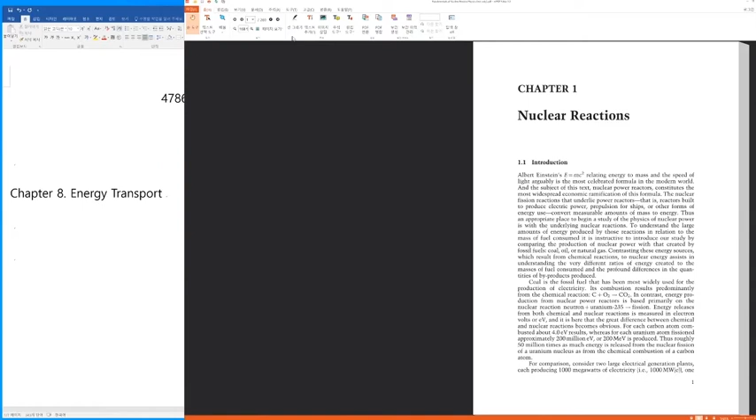We studied control poisons last time, and we studied how reactivity worth is estimated when we insert control rods. We learned two different cases: the first is when we only insert a single control rod, and after that we learned the case of inserting a control rod bank.

In this case, the assumption we utilized for inserting a control rod bank is that the whole area, or the whole volume, will be affected by the insertion of a control rod bank.

And so of course, if the control rod bank is inserted to x amount of depth, then this whole rodded volume will be affected by that inserted control rod bank. And we derive those equations, equation 7.99 and 7.100, depending on whether alpha is bigger than beta, or beta is bigger than alpha. These equations determine the multiplication factor k after the insertion of control rod bank, and because we have the change in multiplication factor, we are able to determine the reactivity. That is, if we inserted control rod bank, we are able to estimate or calculate the inserted negative reactivity by the insertion of control rod bank.

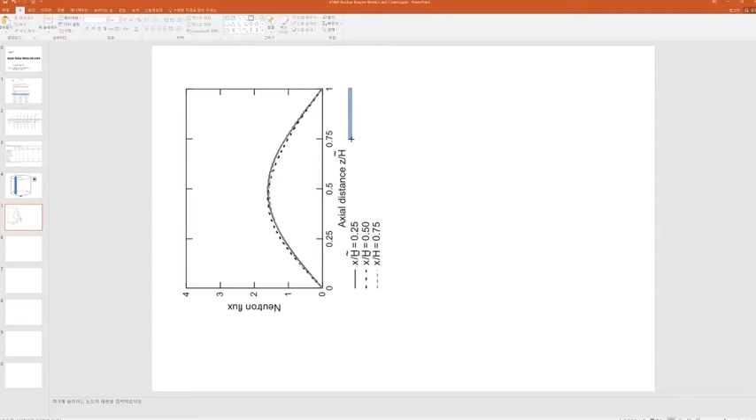So if we rotate this counterclockwise, this would be the shape of the neutron flux in the axial direction. And even though we inserted the control rod bank to a quarter of the reactor, or in this case almost half - first the quarter of the reactor, second almost the half of the reactor, and in the third case it is also almost inserted to 3/4 of the reactor - in these three cases, the overall shape of the neutron flux does not significantly change. That is why it is called a tightly coupled core.

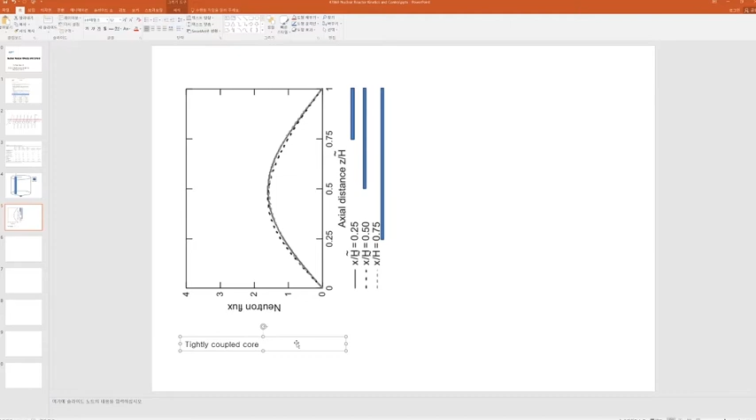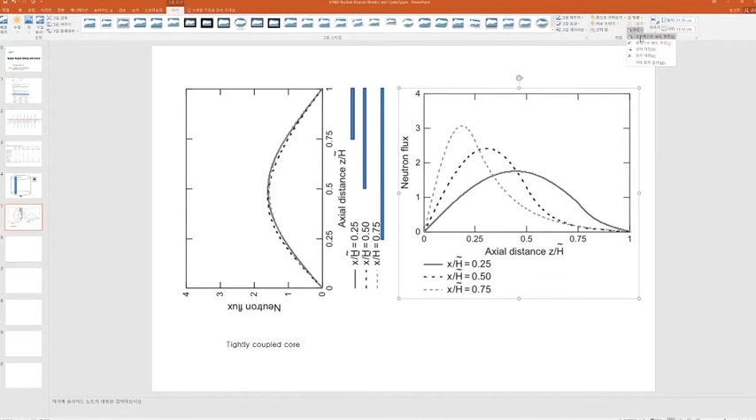So on the other hand, let's move to the second case. Once again, I'm going to rotate this counterclockwise, and move through these three different cases. This is the case when we inserted the control rod bank to the depth of just a quarter of the overall height. The second case is when we inserted the control rod bank to the half of the height, and the third is about 3/4 of the height of the reactor.

And you can see, if you look at this figure, why this is called a loosely coupled core. Compared to the first case - this is the case when height over migration length is around 10, and this is the case when height to migration length is around 50 - you can see that it is much more loosely coupled. The neutron flux in the upper part is different from the neutron flux in the lower part of the reactor. So whether a reactor core is tightly coupled or loosely coupled is determined by this ratio of height to migration length.

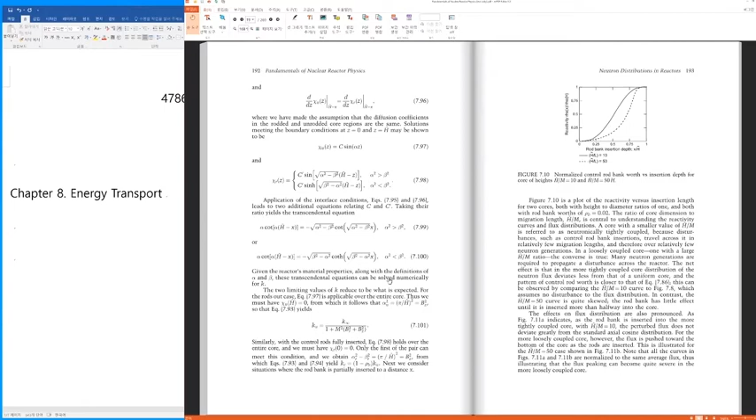So these were what we studied last time, and I also asked all of you - I'd like to see whether any student is able to draw these figures based on the mathematical analysis results provided in our textbook. If you utilize these mathematical descriptions, and if you understand and actually implement this, then you will be able to draw all these figures. So let's see who is going to successfully accomplish or finish this challenging problem.

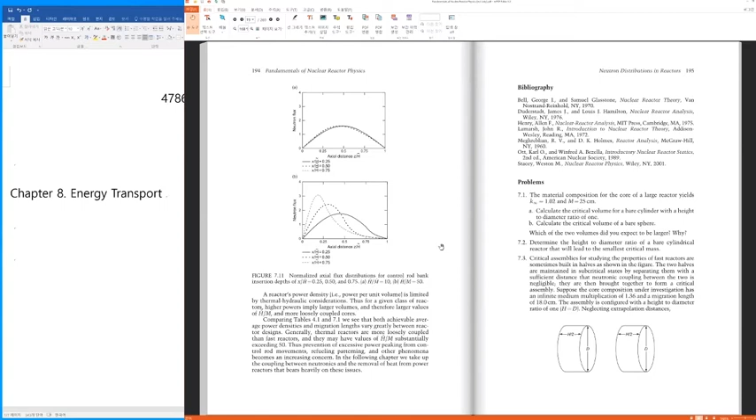So we just finished chapter or section 7.6 in our textbook, and from today we are going to talk about chapter 8, energy transport. So, energy transport.

So if we read the textbook, we are currently studying the course titled nuclear reactor kinetics and control.

The question that may be raised is, why do we study energy transport? The reason is that the preceding chapters concentrate on the time and space distribution of neutrons, and these equations are valid if the reactor power is very low.

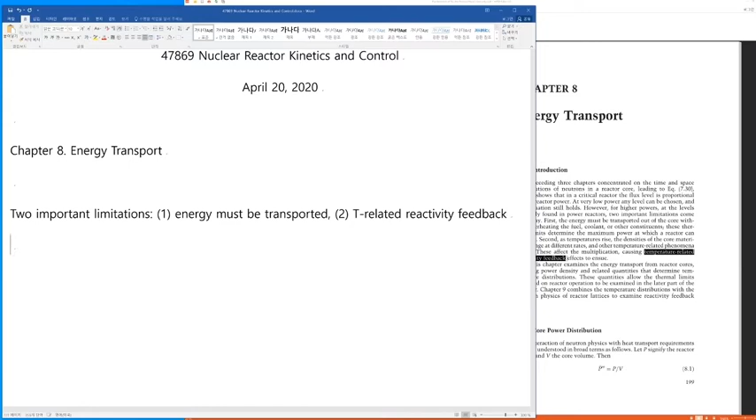So let's move on. Basically this chapter examines energy transport from the reactor core, and we are going to see what thermal limits will be imposed. After that, in chapter 9, we are going to examine the reactivity feedback effect. So in chapter 8, we are going to focus on the transport of energy and the thermal limits, and also learn how disturbances in temperature will affect the reactivity.

So anyway, let's first talk about core power distribution. That is section 8.2, core power distribution.

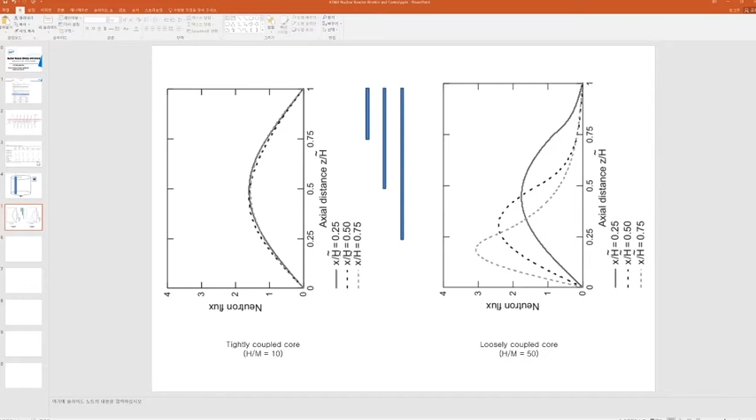With that value, these PWRs or BWRs usually belong to loosely coupled cores. The number of fuel pins and non-leakage probability, these data are also given for six different types of reactor cores: PWR, BWR, CANDU reactor, high temperature gas cooled reactor, sodium cooled fast reactor, and gas cooled fast reactor.

Let's move back to our textbook. This table 8.1 provides us some typical data that we can utilize in understanding what is provided in this chapter.

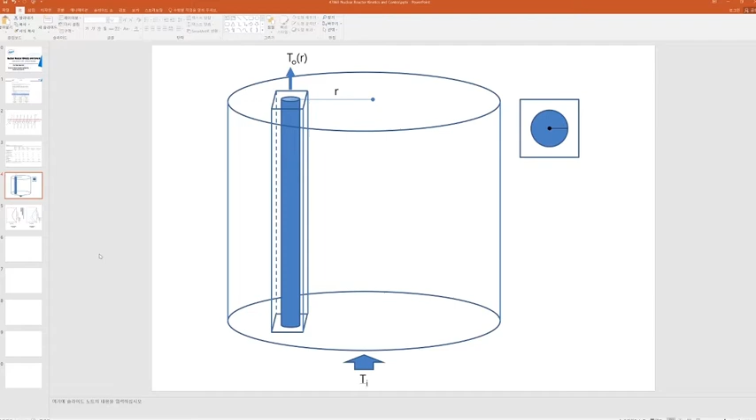Let's just think about a finite cylindrical core. Once again, let me show you this figure. In fact, I drew this figure myself, and we are going to think about a cylindrical reactor core. So back to our textbook.

Let's think about how we are able to calculate the average power density. Section 8.2, finite cylindrical core, and let's calculate the average power density.

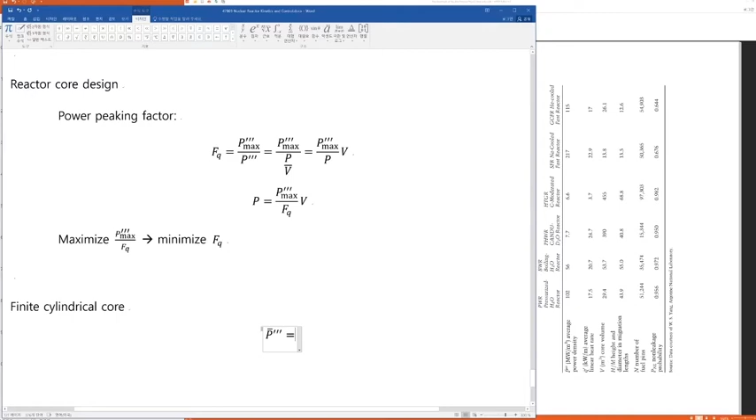The average value of this - so this is the average. To calculate the average value of power density, what we should do is calculate the overall power divided by the volume. So to calculate the power, we should integrate.

Of course, depending on the geometry of the reactor core, the power density as a function of its location can be calculated. So R vector indicates the location of interest in the reactor, divided by, multiplied with small volume dV.

This equation applies to any reactor core. In case of a cylindrical reactor core, let's first think about the volume. The volume will be provided as pi times radius squared multiplied with the height of the reactor. So this would be the volume of the reactor.

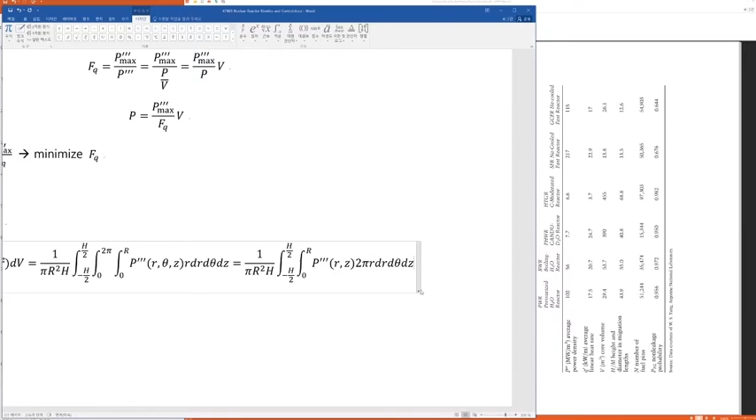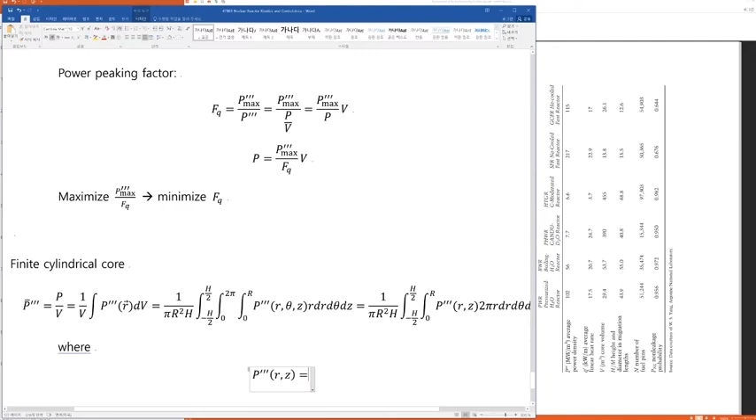And after that, we are going to use the relation that this power density or power at any point is divided into a power peaking factor in the radial direction and axial direction. That means the power at the point at some r from the center, and z from the center of the reactor core, is given as the average power density multiplied with another function for the change of reactor power in the radial direction, and also the change of reactor power in the axial direction. So if we assume that power density at a specific point is given like this, then we may rewrite this equation.

So instead of power density at a specific point, we substitute this equation. What can we do with this? This average power will be just constant with respect to the radial direction - and I'm sorry, I should also erase this theta here because we do not have any dependency, and 2 pi is just the result of this integration. So in the radial direction, we are going to take this average value out of the integral, and we are going to cancel the pi here and also the pi in the numerator.

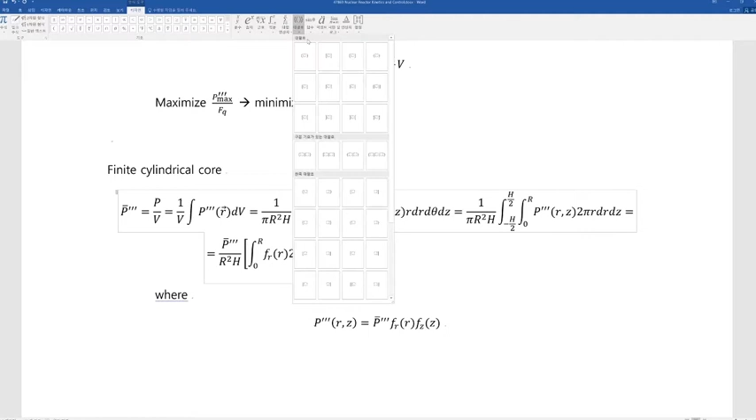And we are going to move r squared h, distributing this. So r squared will be placed here, so 1 over r squared, and also we are going to insert 1 over h here. So then in that case it can be just average power density, and because 2 is just a constant, we may take this out.

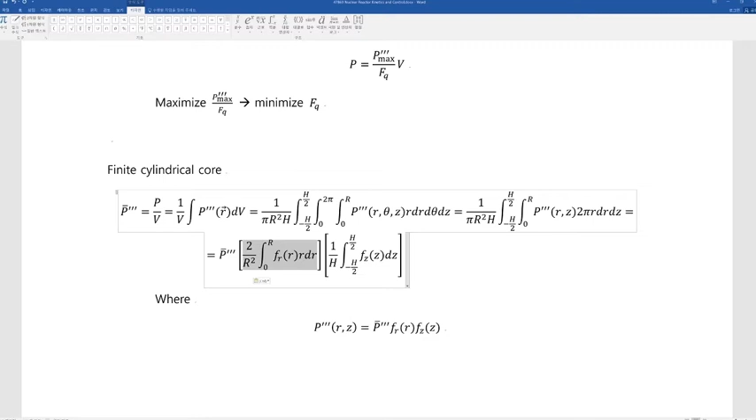So what does this mean? So average power density—we have another average power density here. So this means that this integration should become 1, that means this integration should be 1, and also this integration also should be 1. So these relations are given in equations 8.9 and 8.10.

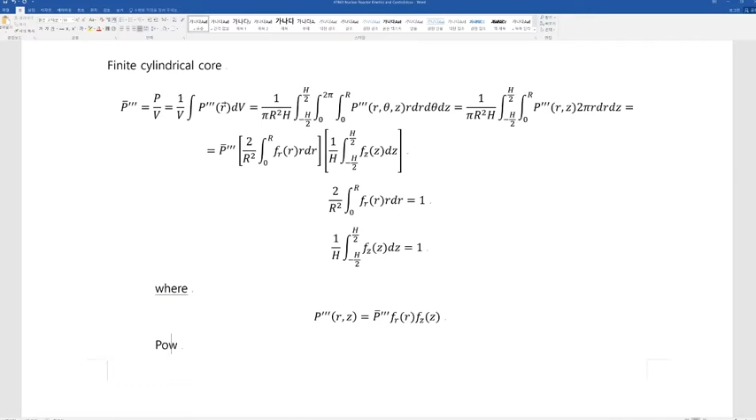And we are going to define, so previously, power peaking factors—we will be able to define two power peaking factors. Capital F subscript R will be the power peaking factor in the radial direction, so it can be called the radial peaking factor. And also we are able to think about the peaking factor in axial direction. So of course this would be the maximum value of FR.

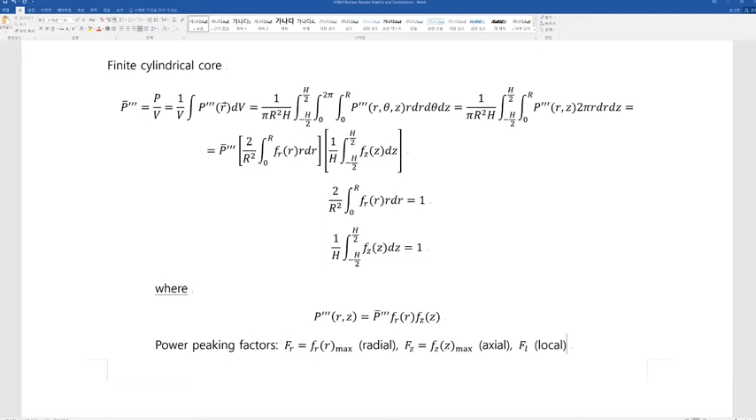Also, similarly, FZ, the axial peaking factor, will be the maximum value of fZ here. And also we are going to—so these two will be defined theoretically, and we will be able to define another one called the local peaking factor, denoted as F subscript L. This local peaking factor is for considering all other types of elements like fuel element manufacturing tolerance, and local control, instrumentation perturbations, and so on.

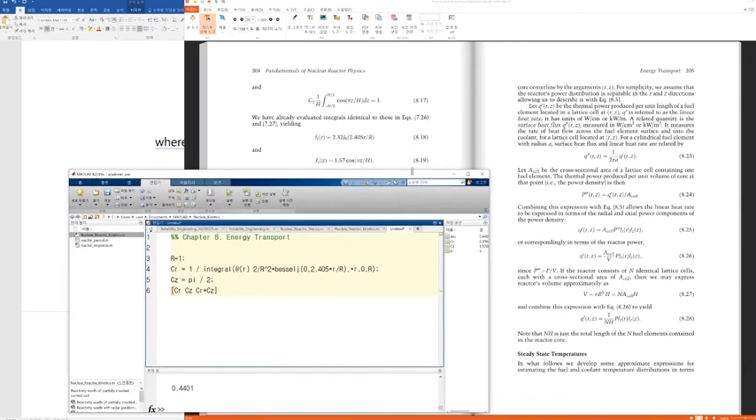And in the case of the first one, if we utilize MATLAB, then this is CR. So in our previous case, CR and this integration should become 1, that means CR should be given as 1 divided by this integration. So this integral of 2 divided by r squared, and integration over the Bessel function with 2.405 r divided by r, and we multiply by r, and then numerically integrate this from 0 to r.

And the result is that CR is given as 2.3165, and this is half of pi, and if we multiply these two, we get 3.6387. So these numbers are given in equations 8.20, 8.21, and 8.22.

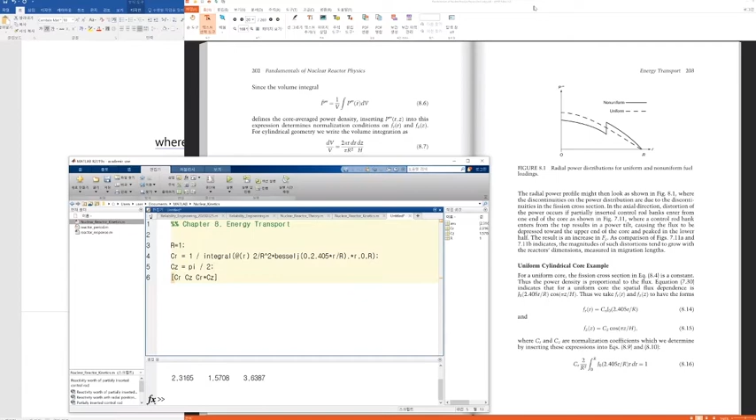So the point is that from these properties that this FR function should satisfy, and this fZ function should satisfy. In case of a uniform cylinder core, we are able to calculate FR as... let's see, FR was 2.3165. FZ is in fact given as half of pi. And FQ is given as the product of FR and FZ.

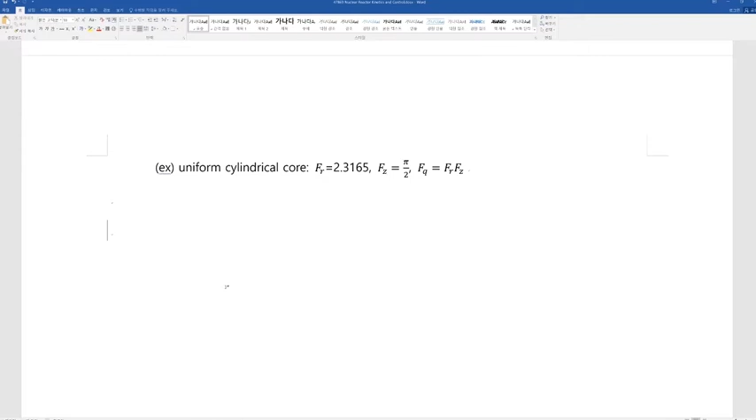So I hope all of you also try yourself to figure out how these numbers came from, and actually draw the shape of the neutron flux, so that you can understand why minimizing this radial peaking factor is important in extracting maximum power from the volume of the reactor that is already fixed.

So we just finished section 8.2. Well, it's already 4:10, so why don't we, even though it's a little early, stop at this point and take a short 15-minute break, then continue to learn about heat transport in section 8.3.

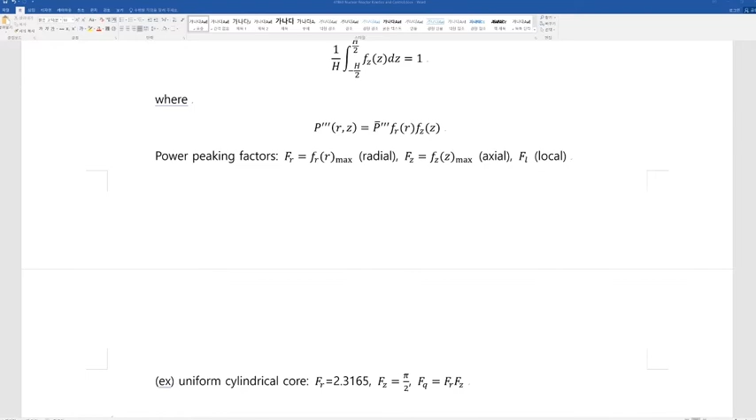Okay, let's start the second half of today's lecture. So we are going to talk about heat transport in section 8.3. We are going to talk about the steady state heat transfer, using a relatively simple model. The target reactor that we are going to consider is a cylindrical reactor.

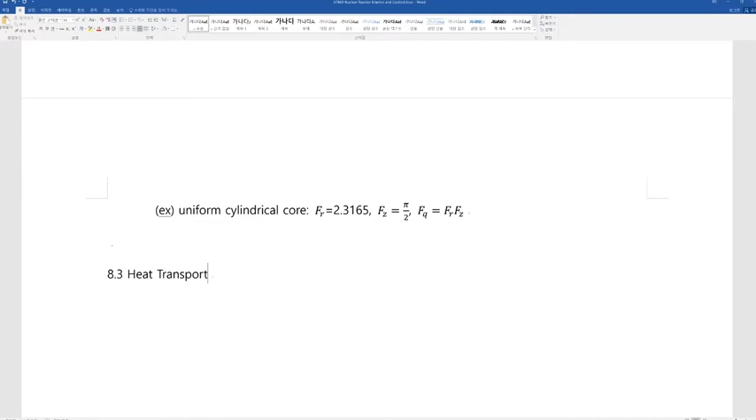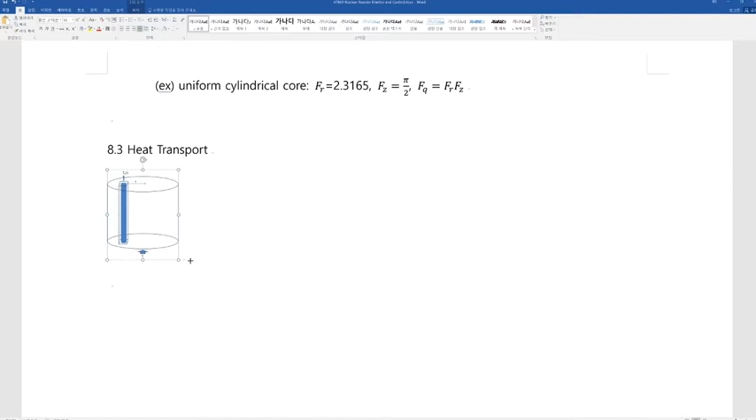So let me show you this figure one more time. This is the case that we are considering. Let's try to move this figure to our notes. So 8.3 is about heat transport, and I hope you remember we are currently thinking about a reactor core in this shape.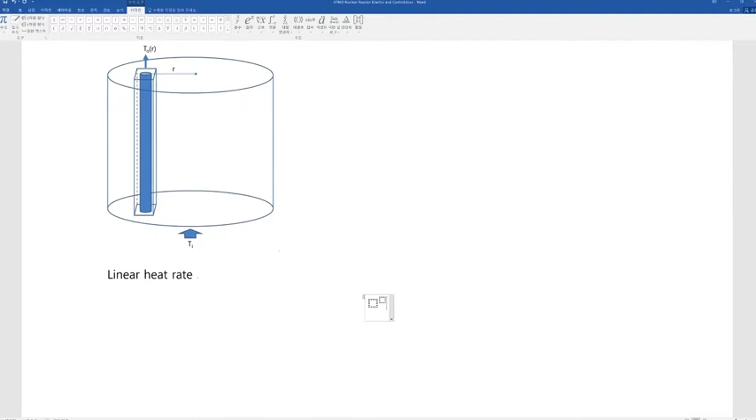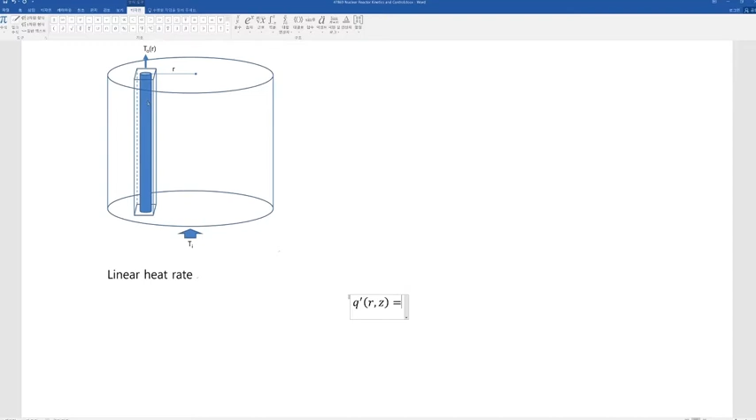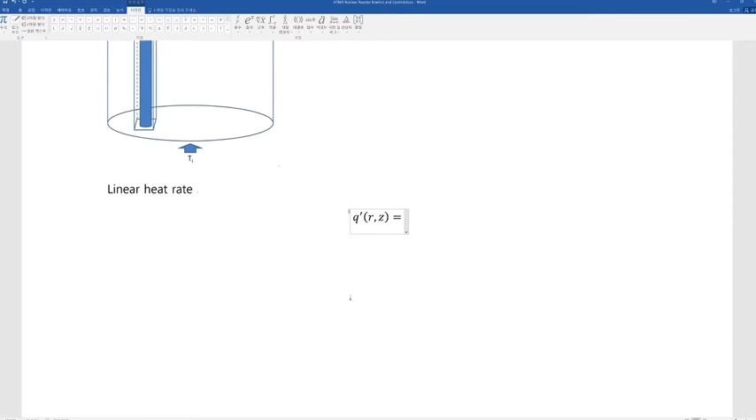So the first thing we are going to think about is linear heat rate, denoted as Q prime, as a function of R and Z. So this is the linear heat rate for a single fuel rod, and at any specific point R and Z, we are going to think about the linear heat rate at that specific point. That's also in our textbook; this linear heat rate appears in many different places, and we are going to first focus on this linear heat rate.

So another figure that we need to take is this. This is the figure where we see the fuel rod from the top, and the radius of the fuel rod would be A. If some amount of heat is produced inside of the fuel rod, then that heat needs to be transported through the surface of the fuel rod.

So when we think about the surface heat rate, surface heat flux, the relation between linear heat rate and surface heat flux would be 2 pi A. 2 pi A multiplied with the height will be the amount of the surface area of the fuel rod. So if we see all the height of the fuel rod, the heat generated inside of the fuel rod should be transported through the surface whose area is 2 pi A multiplied with the height.

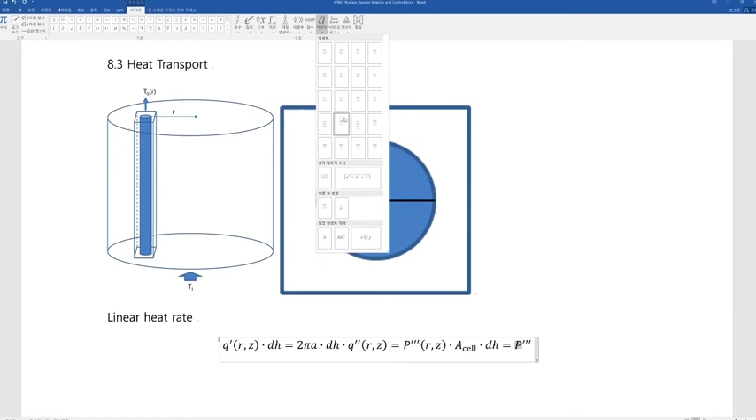So if we think about this relation, the power density at a specific point was considered to be the average multiplied with this fr and fz function. So we are going to just use this relation.

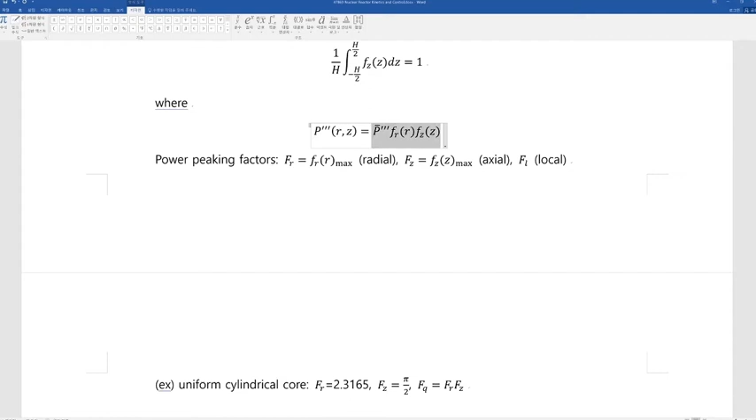So instead of power density at a specific point, we are going to replace this with this equation multiplied with a cell and very small height, dh.

And what about this average power density? Average power density will be given as the total power divided by the volume, the total power that is produced from the reactor divided by the volume of the reactor.

And then what about the relation between the volume and a cell? So let's assume the total volume is completely filled with n cells. So there are in total n number of this kind of cell.

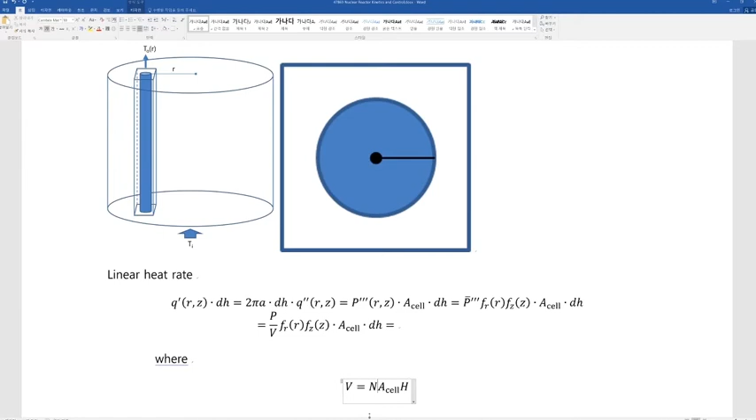And in that case, the total volume will be equivalent to, first let's calculate the volume of a single cell. So the volume of a single cell is a cell multiplied with the height of this cell, given as h, and let's assume the reactor volume is completely filled with n cells. So the volume is given as nh multiplied with a cell.

So this is actually nh multiplied with a cell. In other words, if we rewrite this, it becomes like this, and this a cell in the numerator and denominator cancels each other. This is the kind of result that we are going to get.

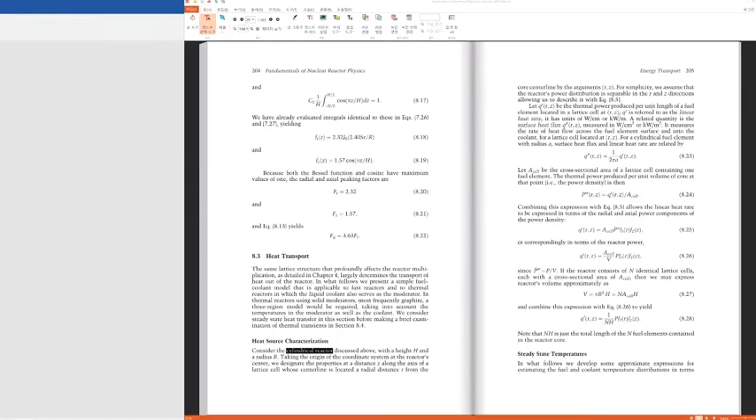So with this in mind, let's review what is written in our textbook. This surface heat flux is given as 1 over 2 pi a multiplied with q prime, and this q prime also equals the power density multiplied with a cell. So if we multiply dh to both the left and right hand side, that is the equation we consider here.

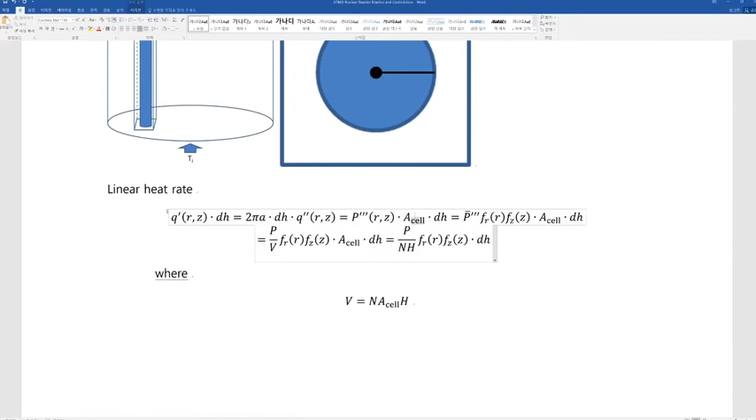And this q prime is also given, so if we rewrite the power density at this specific point with the average power density multiplied with FR and FZ, the functions for peaking factor.

We are going to simplify, the average power density is now rewritten as power divided by volume. With consideration of the relation between the volume and the area of a single cell, a cell, since the volume is given as NH times a cell, only 1 over NH remains here. So here we have the relation between linear heat rate and the power, and these functions for peaking factor, where N indicates the number of cells, and H is the height of the reactor.

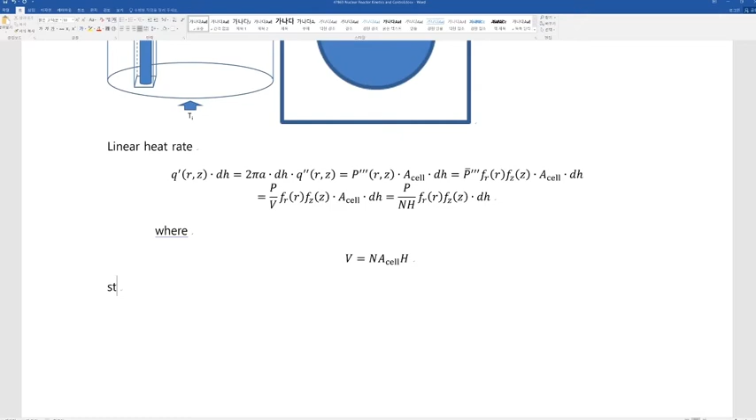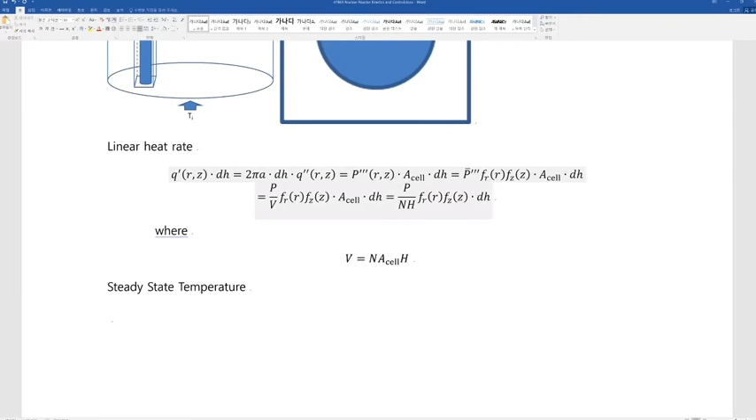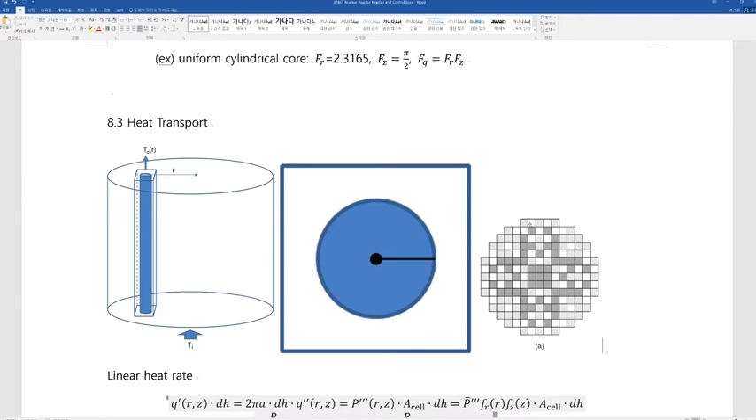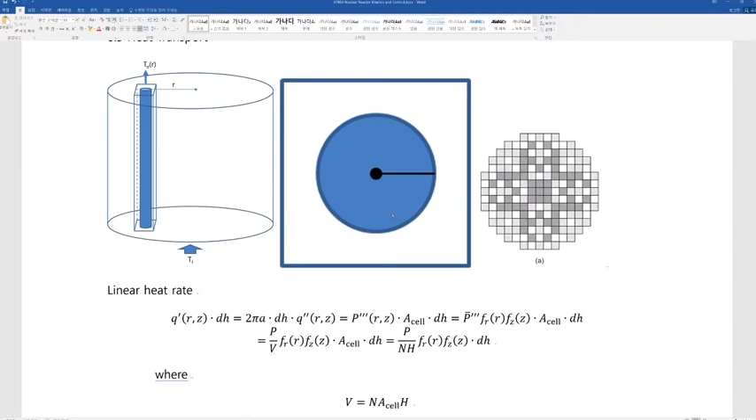Related to the linear heat rate and other relations, with these figures in mind, let's assume the reactor is completely filled with these cells. This reactor has N number of what we call fuel channels, so in this case it's called a single cell. Let's assume the reactor consists of N number of fuel cells. I hope all of you try to derive these relations yourself to completely understand them, as provided in this textbook.

Next we are going to talk about some relations about temperatures. First, this linear heat rate.

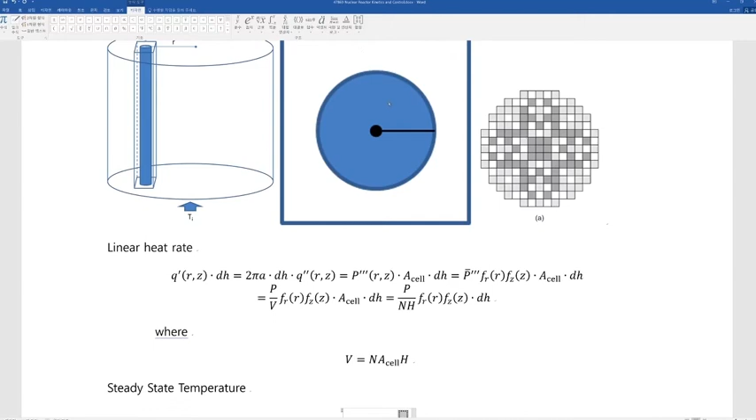Usually for linear heat rate, our basic understanding is that the higher the temperature difference is, the bigger this linear heat rate will be. That means if there's a fuel region and coolant region, and if the temperature difference between the fuel and coolant is high, then more heat will be transported.

That also means the amount of heat transported gives us information about the temperature of the fuel. So the linear heat rate will be given as the temperature difference, in this case the temperature of a fuel element at this specific point, and the temperature difference between the fuel element and coolant.

And we are going to multiply by some constant here, which can also be expressed with some resistance, for the fuel element. Just like current is given as the difference in potential divided by its resistance, the heat rate is given as the temperature difference divided by its thermal resistance.

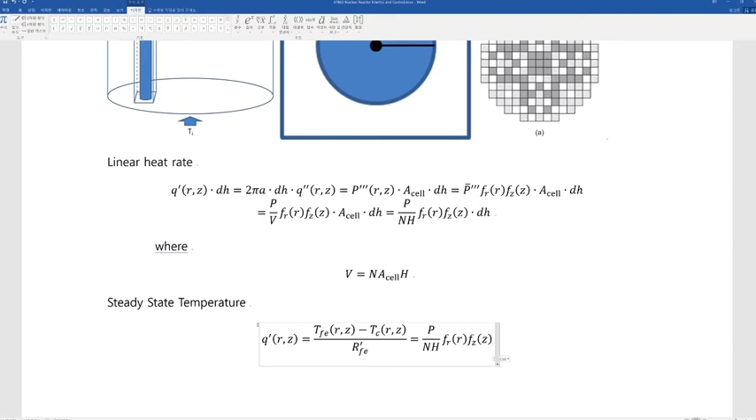Previously it was given that if we also ignore dH, then this linear heat rate will be given like this. If we move 1 over NH to the denominator of the left hand side, we just leave P here. However, we would like to move 1 over NH to the denominator of the left hand side, so it is going to be changed like this. So this is the relation.

So here, the first line was equation 8.29, and then this is going to be equation 8.30.

And of course, once again we are going to move this parameter to the right hand side. So of course it does not have any denominator, it becomes like this. And then we are going to integrate over all volume.

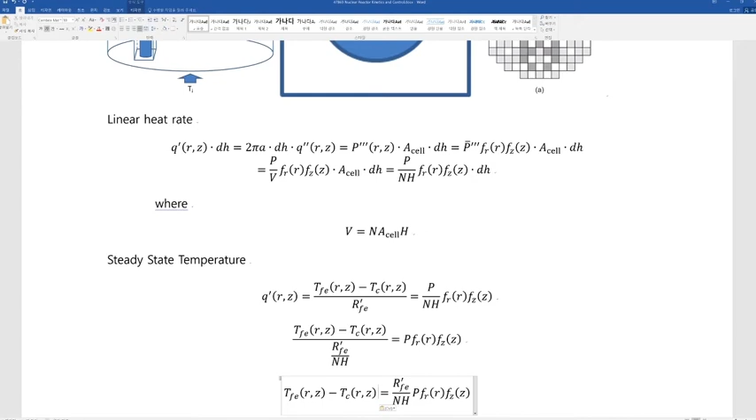So we have R and Z, and we are going to integrate this over all volume. First we place a parenthesis and then integrate over all volume, that will be the same as integrating over all volume, and divide this by 1 over V.

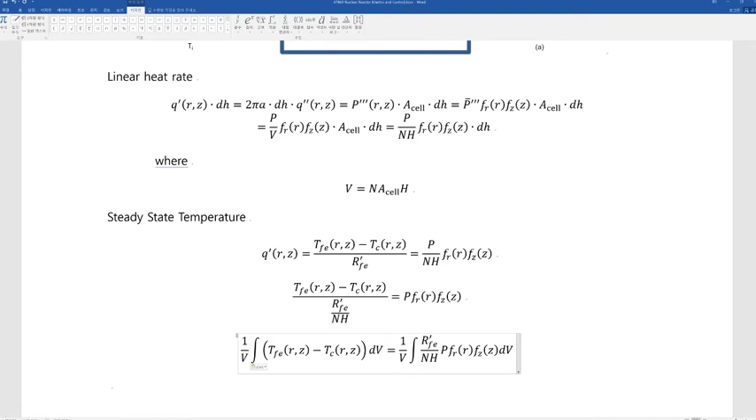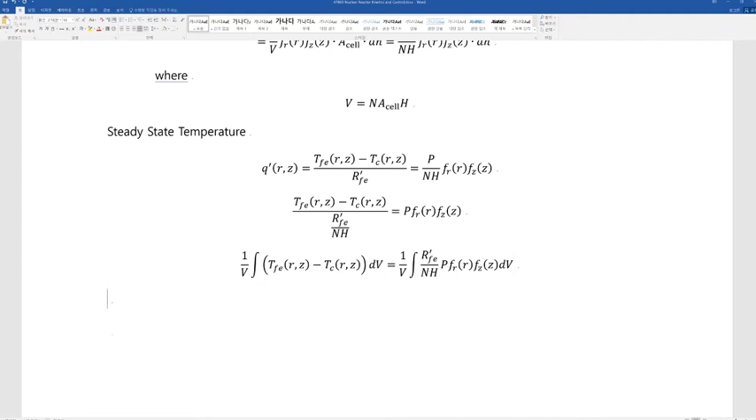So we would like to calculate the average value of fuel temperature and also the average value of coolant. With this, previously it was just the temperature of a single fuel element. If we integrate over all the volume of the reactor, now instead of a fuel element it should become the average temperature of the fuel, and the second term will be the average temperature of coolant.

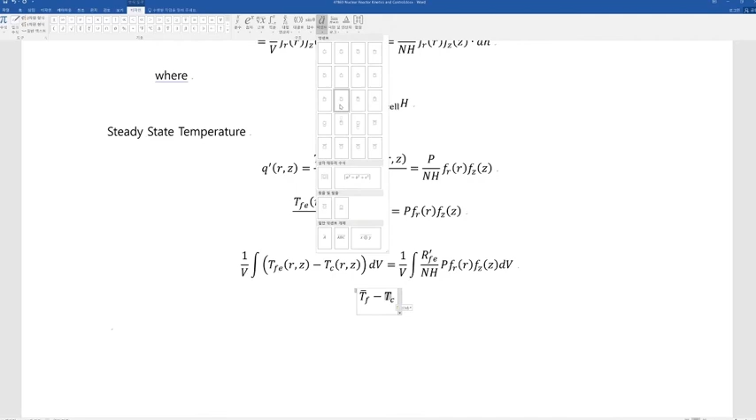So average temperature of coolant is given. Let's think about the right hand side: for power, if we take P, we have a total power here, and this is the thermal resistance for a single fuel element or a single fuel cell.

And if this is divided by NH, that is going to be RF. So I should add one more thing here: this denominator is defined as R, that is RF. So this RF is the thermal resistance, and we may replace this with RF.

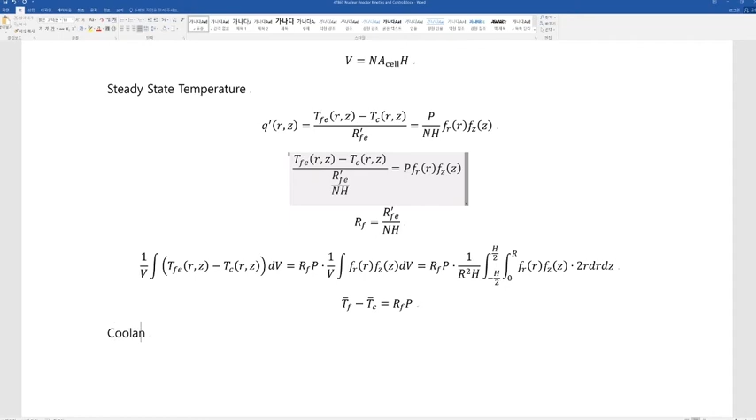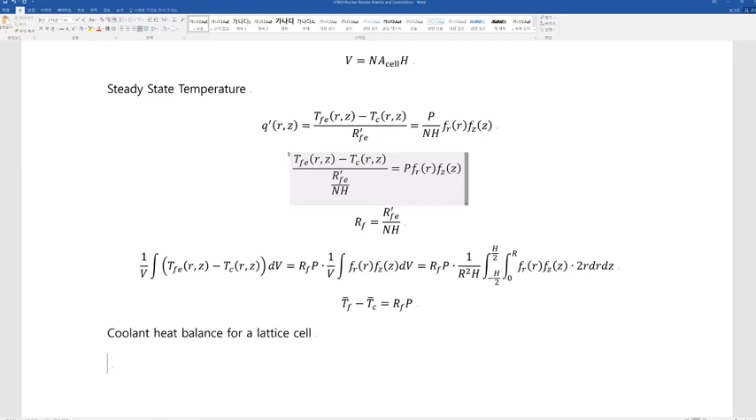And next, we are going to consider a coolant heat balance for a lattice cell. So that means, from here maybe it's better to see this figure. So for a single lattice cell...

So the inlet temperature will be uniform. That means the coolant temperature that is entering from the bottom does not have any dependency on R. So at every point, at every lattice cell, the coolant enters with temperature Ti. It is not a function of R.

But because we have different power distributions in the radial direction, the outlet coolant temperature will depend on the position or location of the fuel rod. So T outlet depends on R, the distance of the fuel rod from the center.

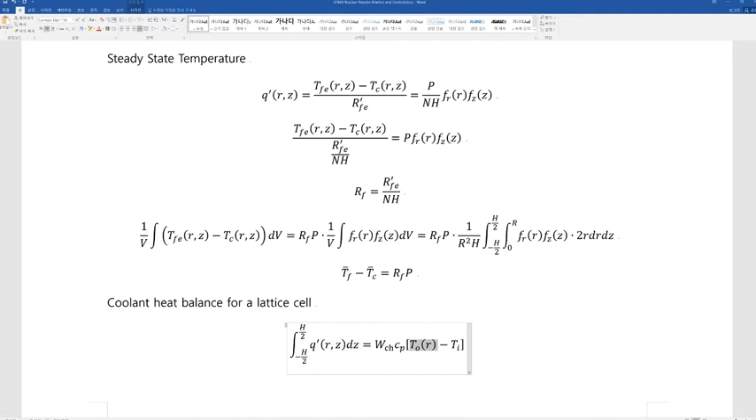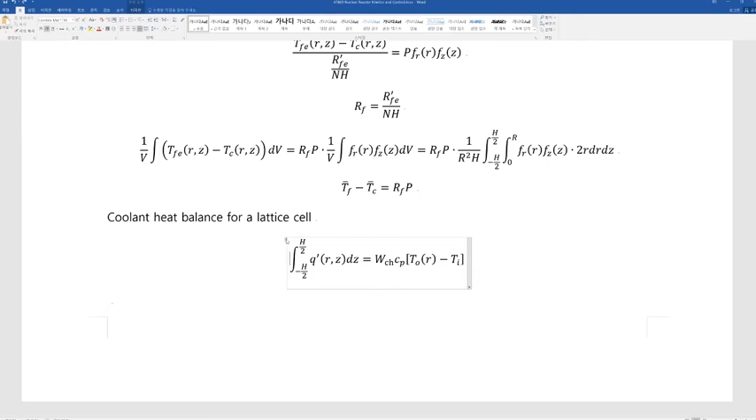So with this, we are able to calculate the outlet temperature. Let me rewrite this. So the final objective is to find the outlet temperature. For that purpose, the mass flow rate and specific heat move to the left hand side, and then we add Ti, so it becomes plus Ti, and this becomes the outlet temperature.

And that's equation 8.36 - oh, I'm sorry, that becomes equation 8.34.

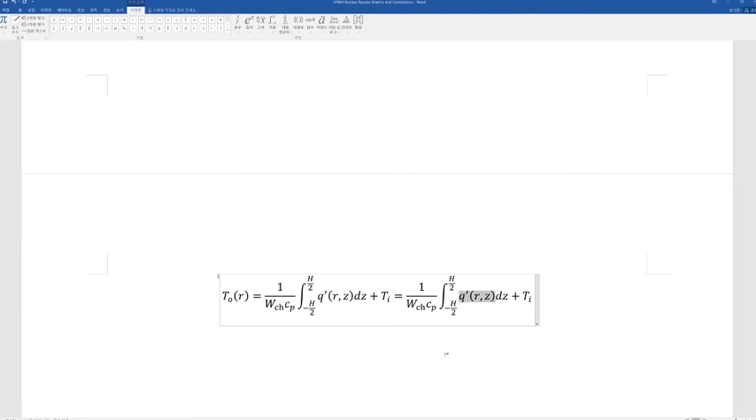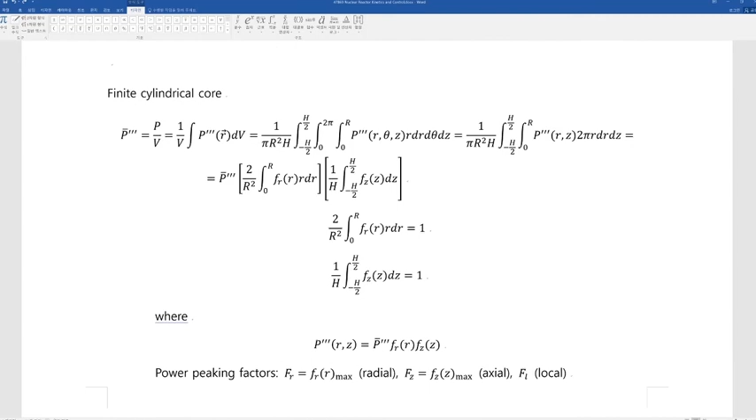There's one thing we also need to add: what about this q prime? Q prime is given - previously it was given as... let me take the relation, not here.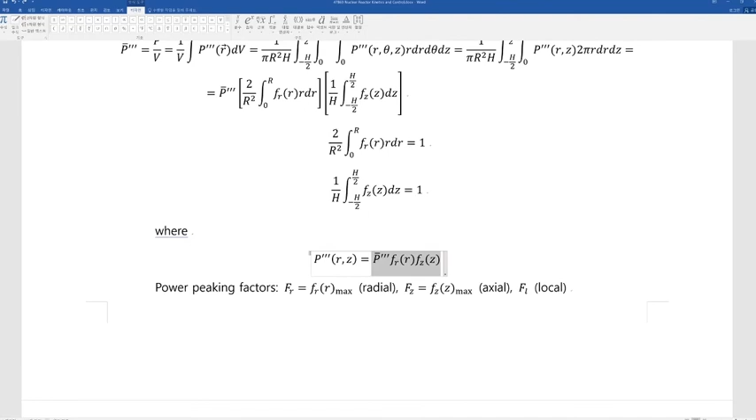So here, q prime was given as average power density multiplied with Fr and Fz, and average power density was given as P divided by V, the power divided by the volume of the reactor, and after the area of the cell is cancelled out in both numerator and denominator, we have this relation.

So that means q prime, in this equation also, q prime can be given with this relation. And the power, number of lattice cells, and height, these are all constant with respect to the parameter for axial direction. And in fact, Fr is also only a function of r, so it is not relevant to z, so this can also be taken out.

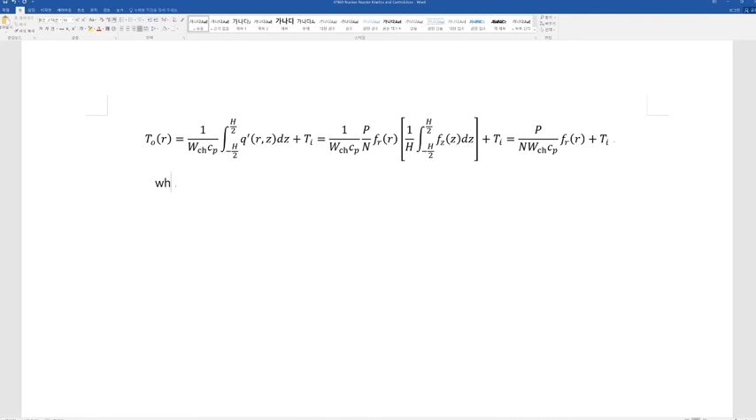We are going to define W as N multiplied with WCH, that is the mass flow rate of a single fuel cell multiplied with the total number of lattice cells. So W is in fact the total mass flow rate. So it is called the core mass flow rate.

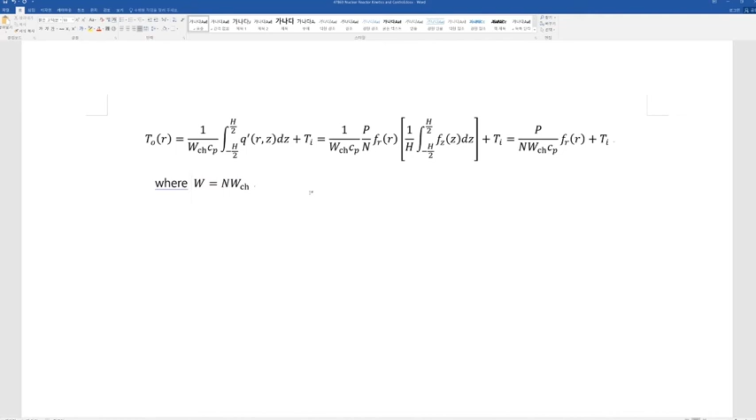So by simply introducing W, this becomes W, FR plus TI. So if we, to be consistent with what is written in our textbook, now this is equation 8.36.

So once again, if we go back to our PPT file, what we calculated is the temperature, the outlet temperature, and the outlet coolant temperature from distance r. So outlet coolant temperature from the point which has the distance r from the center of the reactor core. So this is what we just calculated, the outlet coolant temperature at point R.

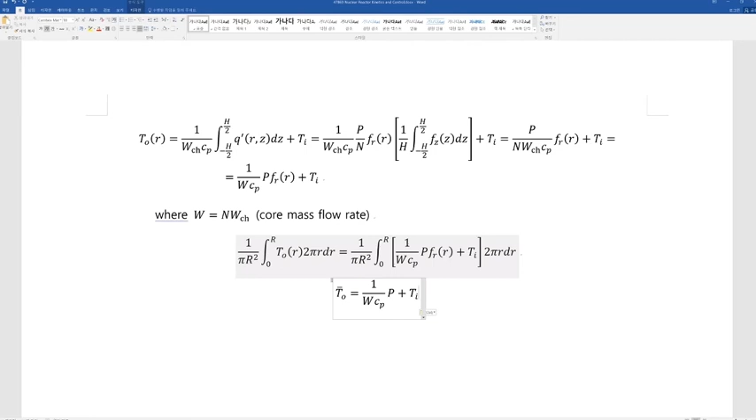So these are the constant parts, and the integration over FR will become simply 1. In other words, if we take this out, the remaining integration will be 1. So about this 2 Ti, it is a constant, so plus Ti is a constant, and what will remain is pi r, 1 over pi r squared, integration from 0 to r. Ti is taken out, and 2 pi r dr. Of course, integration 2 pi r dr will be pi r squared. That cancels. So both the pi r squared in numerator and denominator will cancel out. So this will be what remains to us.

So of course deriving this equation would also be easy if we think about this: power, that is energy per unit time, is related to temperature through the mass flow rate multiplied with the specific heat and the delta T. So delta T is the average outlet temperature minus inlet temperature. So if you also see this equation, then this relation is quite straightforward.

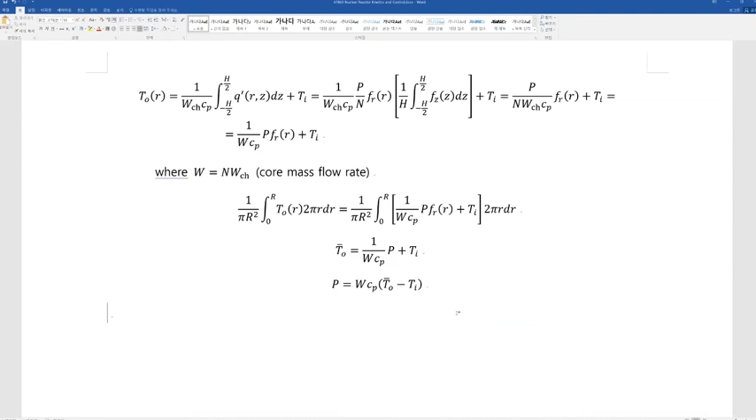So next we are going to calculate average coolant temperature. So this is average outlet temperature, and Ti is the uniform inlet temperature. In that case, we will be able to go back and write the equation. So what about average coolant temperature? The average coolant temperature will be denoted as Tc, average Tc.

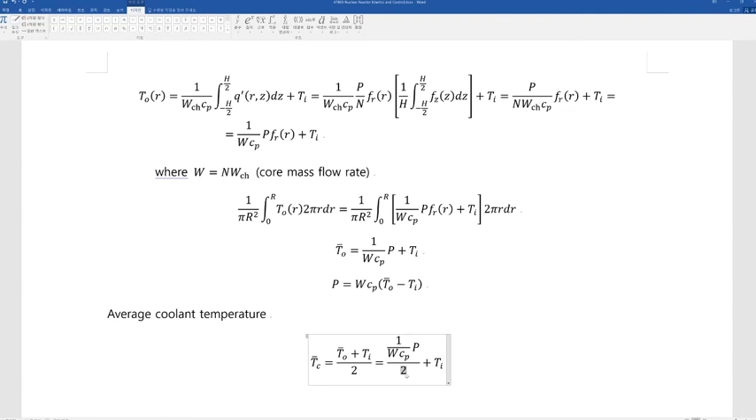That average temperature will be given as the half of average outlet temperature and inlet temperature. Because this is average outlet temperature, first we have two Ti's, that becomes Ti simply. So it is like half will be multiplied. First these two Ti's become 1 Ti out of this 1/2, and this 1/2 can be placed here.

So this is the equation for average coolant temperature. Of course this was calculated as the half of, or the average of, average outlet temperature and the inlet temperature.

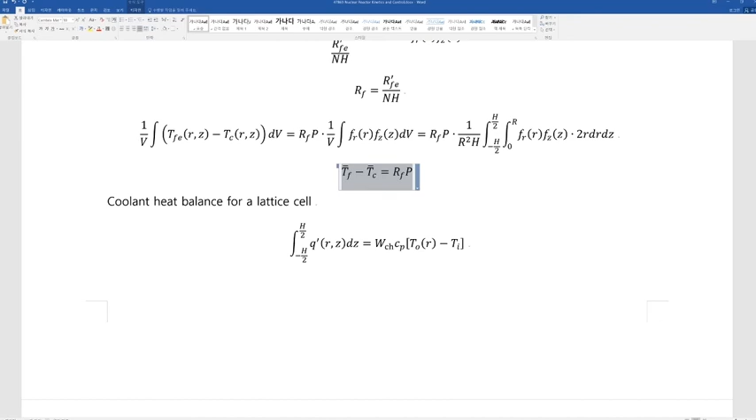So if we know the coolant temperature, previously we calculated this relation, the relation between average fuel temperature and average coolant temperature and the power of the reactor. That means this average fuel temperature can be calculated with this equation: RFP plus average coolant temperature. And because the average coolant temperature is given, first RFP plus average coolant temperature is given in this equation.

So we may take P out. So from this parenthesis, we are going to take P out. So that is equation 8.41. So average coolant temperature is given in equation 8.40, and average fuel temperature is given in equation 8.41. And next, let's try to calculate maximum fuel temperature.

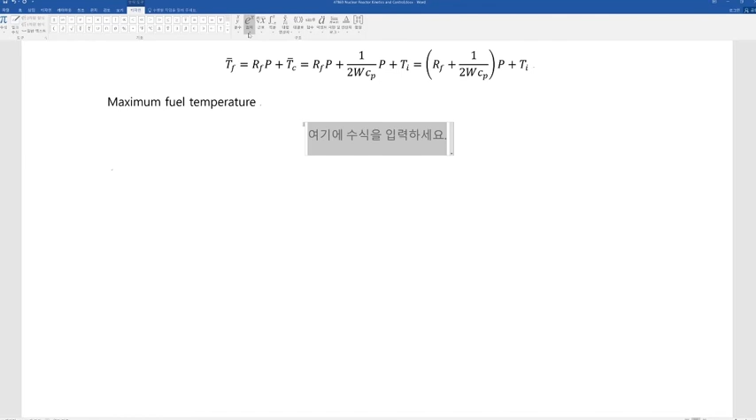So how can we calculate the maximum fuel temperature? To do that, maximum fuel temperature will be related to the linear heat rate. Let me rewrite this: linear heat rate, maybe it is related to maximum linear heat rate, because you may think that the point where we have the maximum fuel temperature is the point where we are going to have the maximum linear heat rate. So you may assume that this maximum linear heat rate can be obtained at the center of the reactor, so R equals 0 and Z equals 0.

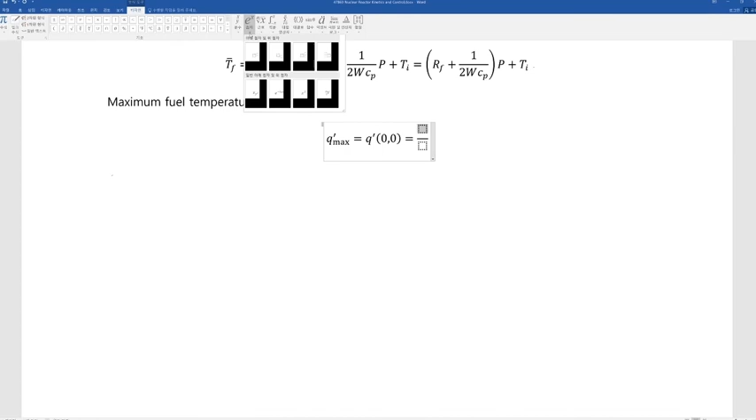So in other words, instead of copying the relation, let's try to take the relation here. Previously this was the relation - in steady state, the linear relation between linear heat rate and the temperature of fuel element and coolant temperature.

At point 0,0, this should be 0 and 0. So at the center of the reactor, we expect the maximum heat rate and also the maximum fuel temperature. So of course this would be also considered as the maximum fuel temperature. I'm going to write it as TF max.

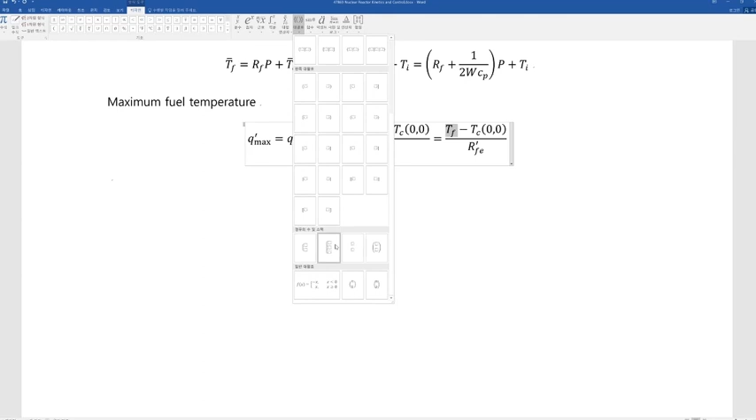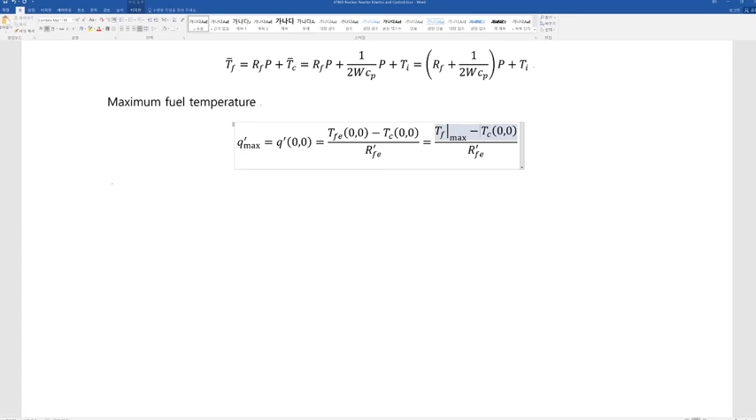To write this as TF max minus the maximum coolant temperature. So how can you calculate this maximum coolant temperature?

You may assume that this is the average coolant temperature, same with the average coolant temperature at the half of the reactor height. So what I'm saying is that from here the coolant enters with the temperature Ti, and maybe why don't we take the relation here. So this is average coolant temperature.

And if the height of the reactor is h, then what you can see is that the amount of heat that is received... let's put it in this way. So let's keep this in mind, and what would be the coolant temperature, average coolant temperature at this point?

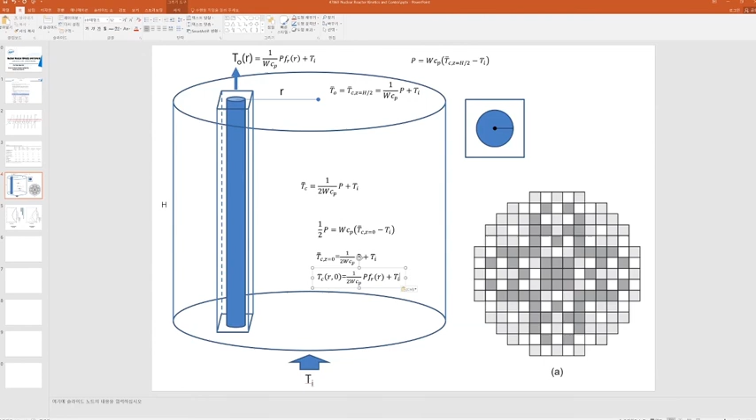So if we would like to also include the dependence on R, then if we would like to calculate the temperature at R, we need to multiply f_r(r). Well, it is somewhat difficult to explain, but anyway, this should be the equation for this. This relation, in fact, should be placed here.